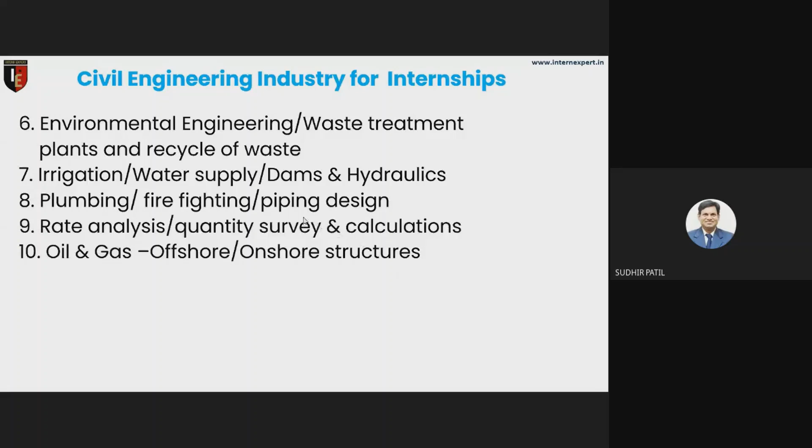Next one, construction management, geotechnical engineering and soil investigation, surveying engineering, building planning and drawing, environmental engineering, waste treatment plants and recycle of waste, irrigation, water supply, dams and hydraulics, plumbing, firefighting, piping design, rate analysis, quantity surveying and calculations, and offshore and onshore structures. So those are the various compartments, you can say that the bifurcations of the civil engineering branch.

Now basically we are having some questions which are asking by the students why this internship is required. So here what we are doing, we are bridging the gap between the industry and the institute, because whenever we are studying in the institutes, we are having the bookish knowledge. So we are polishing the students and making up the product, that is a student, up to the mark to work in the industry as an employee or as an entrepreneur.

Also, as per the AICTE requirement, it is a technical curriculum introduced by the AICTE to have the industry internship training program of the students, of the graduates or postgraduates, whichever they will work in the industry as a polished employee, as a pre-knowledge engineer.

So it is a very beautiful course introduced by us for the institutes, industry, educationists, and technocrats, where those people are working together. The students are having bookish knowledge, as I said, and when they are studying in the colleges, they are having some theoretical knowledge. So we are preparing them to have the exposure of the industry and work with the industry people.

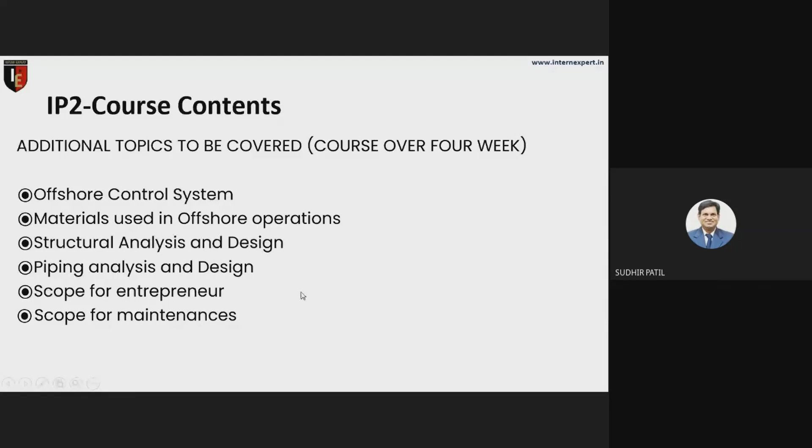As I said, this is the oil and gas industry. It is a huge industry having the scope for all engineers. It is not the ownership of a particular type of engineer. So as a civil engineer, I can say that the role of civil engineers can be played by various types of engineers. It may be mechanical engineer, or it may be polymer, petroleum, or electrical engineer playing this role here, as a civil engineer would.

Whenever you are entering this field, you are having that aura, that knowledge to work. This is an important factor you must take into account.

Next, as far as the world is concerned, the world is having production of oil and gas in thousands of barrels per day. That is 57,037 - the per day production of oil and gas, crude oil. We can say that is the hydrocarbons we are producing in the world. Here there are various countries involved to produce the hydrocarbons: Middle East and the Persian Gulf, North America, North Sea, North and West Africa, Russia, China, Indonesia, South China Sea, and others. So likewise, across this globe, the production is 57,037 thousand barrels per day.

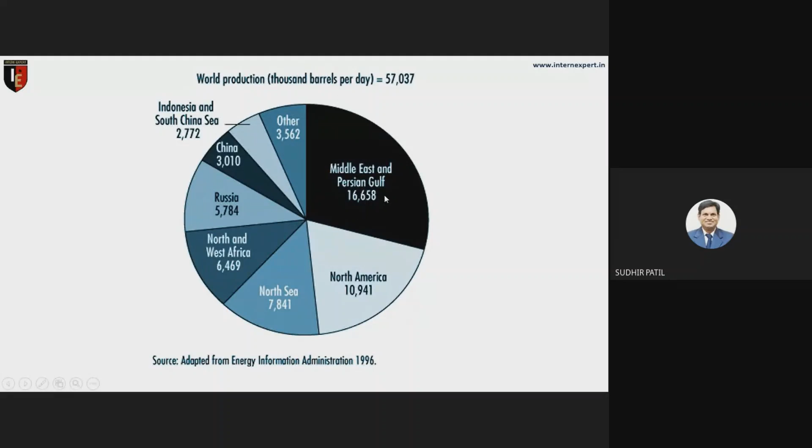Now we must understand there are various compartments, layers of the earth: inner core, outer core, mantle, and crust. The crust has a thickness of 0 to 100 kilometers, and here we can have the pockets of oil and gas. That means the lithosphere, crust, and uppermost solid mantle contain the pockets of oil and gas, or crude oil, you can say.

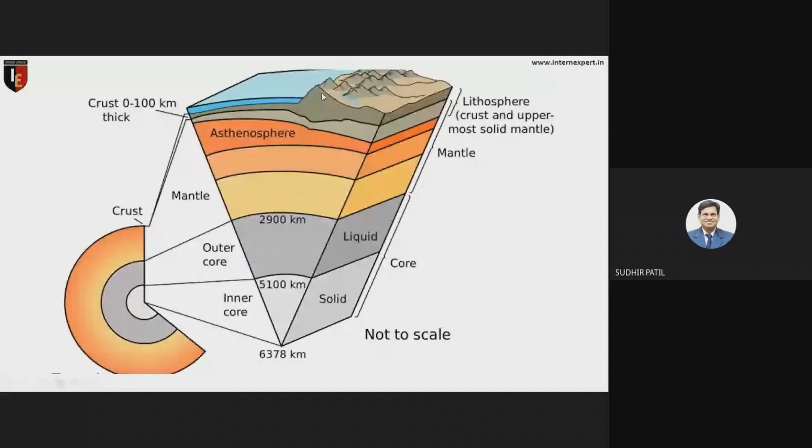Now, where and how can we find new resources of oil and gas? The oil and gas pockets are available in desert areas most of the time. You can observe that, or in the oceans, seas, or where there are faults in the layers of the earth. That means, in the figure, there are some hilly areas where there are faults in the various layers of rocks. So there is the possibility to find oil and gas pockets, or crude oil.

So we must investigate it first. There are various methods to investigate oil and gas pockets. Some questions are asked by students whenever we have these sessions: what methods are used to locate new oil and gas deposits in the earth?

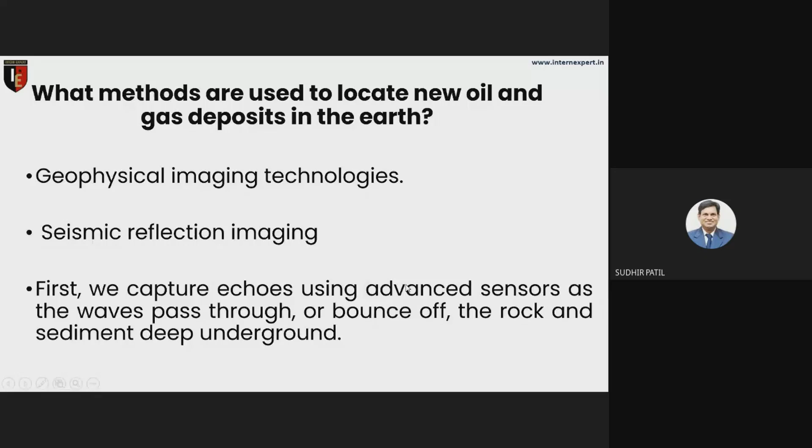There are geophysical imaging technologies, like seismic reflection imaging. First we capture the echoes using advanced sensors, as the wave passes through or bounces off the rock and sediment deep underground. We are also having other methods, which are gravity surveying, magnetic prospecting, and geochemical prospecting. Those are the various methods we use to find the natural resources of oil and gas, or hydrocarbons.

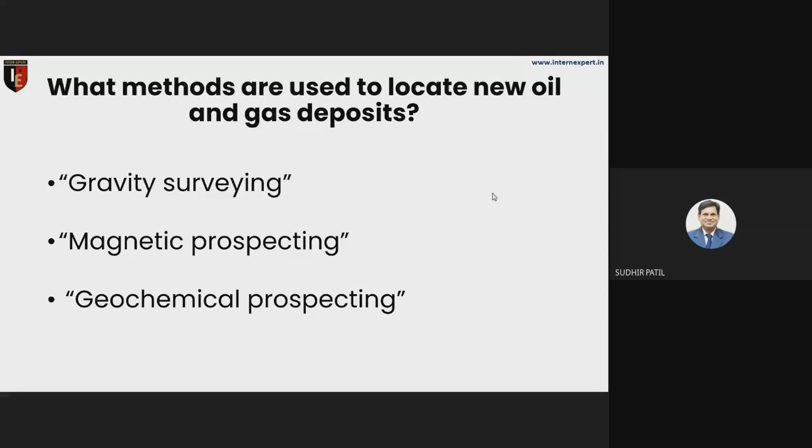Now, how does the oil and gas industry work? It is broken into three segments. I think this part has been explained by the previous mentor also, but I will just recap it and go ahead. So upstream, midstream, and downstream - those are the three main streams, or three segments, of the oil and gas industry. Upstream, or exploration and production companies, are working on extracting the raw material, that is the crude oil.

Then we are having soil investigation, geotechnical studies, and geological studies, which come under upstream, because it is the primary work we do in the oil and gas industry. In this primary work, we do soil investigation and site inspections, where we measure the land undulations, and we prepare the contour line plan. Then we are having a search for reservoirs of hydrocarbons.

That means we are finding the pockets of oil and gas, natural resources in the earth's crust. Then we go ahead with mining, that means drilling for oil and gas wells to extract them from the earth's crust. Whenever we have drilling in the earth's crust, we have to extract those natural resources in the form of liquid, solid, or gases. There are certain techniques used here in the upstream, that is the lifting and extraction of oil and gas. There are certain drilling companies that contract their services in the exploration and production companies which extract the oil and gases.

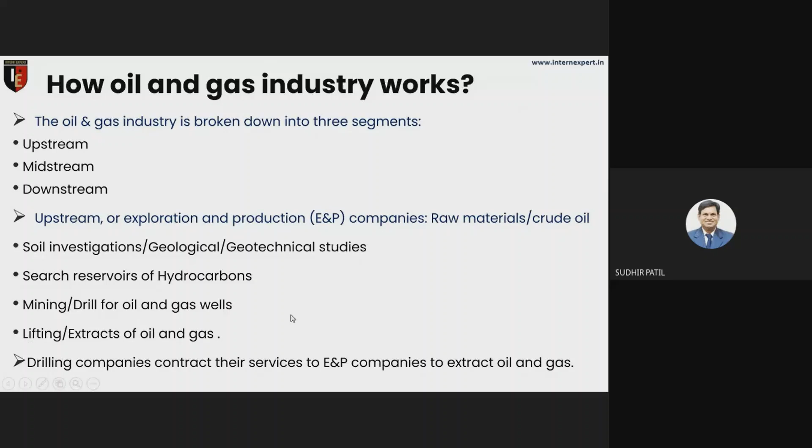Then we study the midstream. In this midstream, we have storages, because we are connecting from the upstream with the help of this midstream. So here we have storage tanks, pipelines, or transportation of crude oil from one place to another, or transportation of raw gases from one place to another. Pipelines, rails, and trucks are used here.

This is the connectivity between downstream and upstream. Now in the downstream, we have post-production. Post-production means we are refining this crude oil and raw gas into the final product. So post-production activities of crude oil and natural gases come under this downstream side. Here chemical processing, that is a refinery, is established, erected, constructed, and by that we get the final product, which may be petrol, diesel, kerosene, etc. Then there is distribution of the final product of oil and gases, and we have retail outlets, that means petrol pumps, oil pumps, CNG pumps, and all. So this is the downstream side.

Now, what is upstream, midstream, and downstream in oil and gas? As we discussed previously, those are the three streams we have. Now where and how can we find new resources of oil and gas? Basically this part comes under surveying, geotechnical investigation, and geology. This is done by civil engineers, so I will elaborate on that part very well.

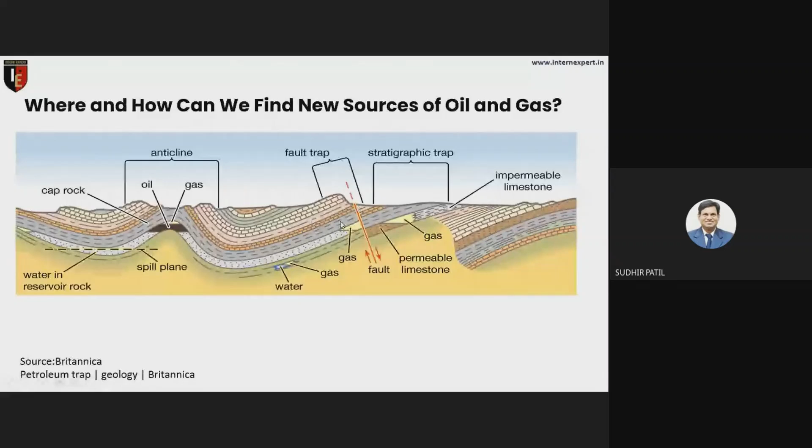This is the layer, one layer of rock which is ending here at the ground level. The layer is there, and at this point, at this line, there are the faults. This is one layer, and here another layer is there, which is the same but at a different level. So at this level, at this fault trap, we also observe that stratigraphic faults or traps are there, where we can find these natural resources of hydrocarbons.

Also, we have impermeable limestone, and near to that we can observe these natural resources of oil and gases. You can observe in the figure very well. This is the anticline trap, where we can observe the oil is there and gas is there, and we are extracting it with the help of oil wells.

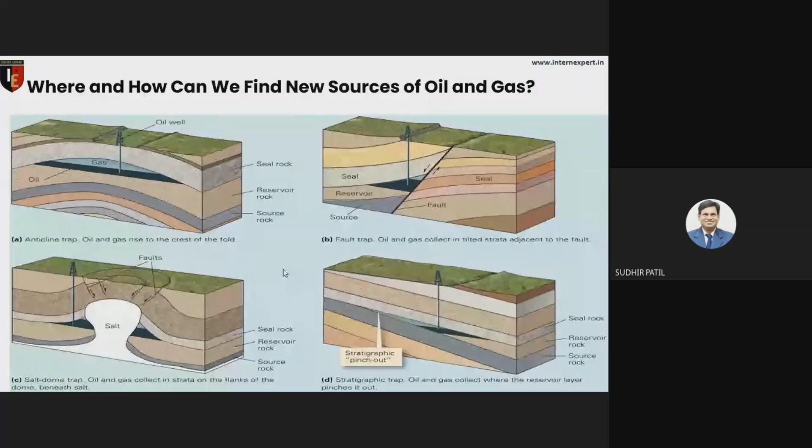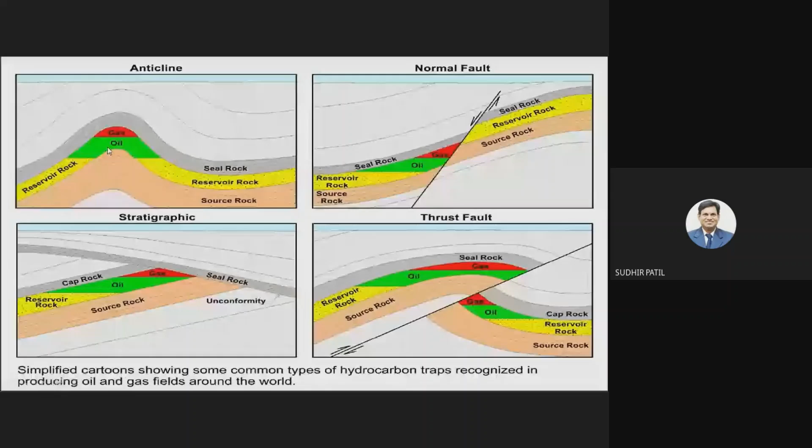In this figure you can observe that oil is there and gas is there. Oil is having maximum density, therefore it is below the gases. So here oil is deposited below the gases. Likewise, we are having various faults, and accordingly we can observe the various pockets and traps of the oil and gases in the faults.

So this is the source rock. Likewise, we are having the various rock layers, and accordingly we are having the trap. In this trap we can find the actual resources of the hydrocarbon.

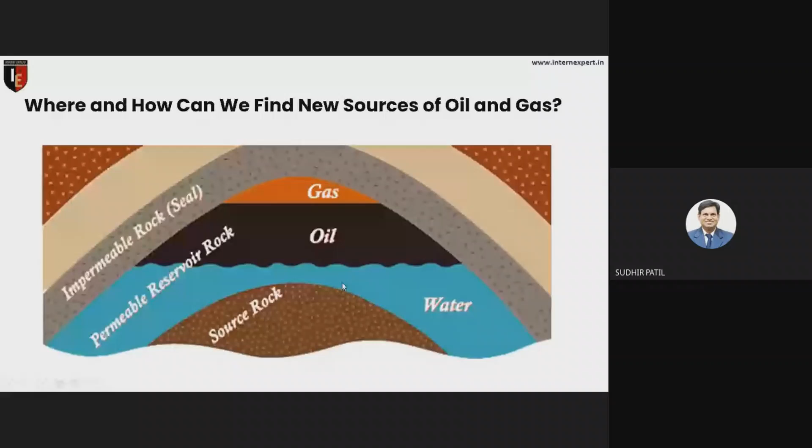Now here this is the oil well. We are drilling here, and we are trying to extract the natural hydrocarbons. Here there is an impermeable rock, and here there is a water layer, oil layer, and gas layer, and there is a reservoir rock. So you can understand that in between the impermeable...

So geologists use a lot of information to locate oil, gas and natural gases. The geologist has certain study and experience in this field, so he can observe the various chemical compositions in the soils and rocks, and accordingly he is collecting the information and trying to think about where the oil and gas pockets are available.

By drilling several cores also, we are taking them mile apart, and accordingly we are correlating those cores of the rocks, and accordingly we can find the pockets of the natural resources of oil and gases.

Now there are other techniques we are going to use, that is seismic signals. The question was asked by the student: how and where we can find new resources of oil and gases. So by generating the seismic signal in barren land or seashore, that is, it may be onshore or offshore, for the natural resource of oil and gases.

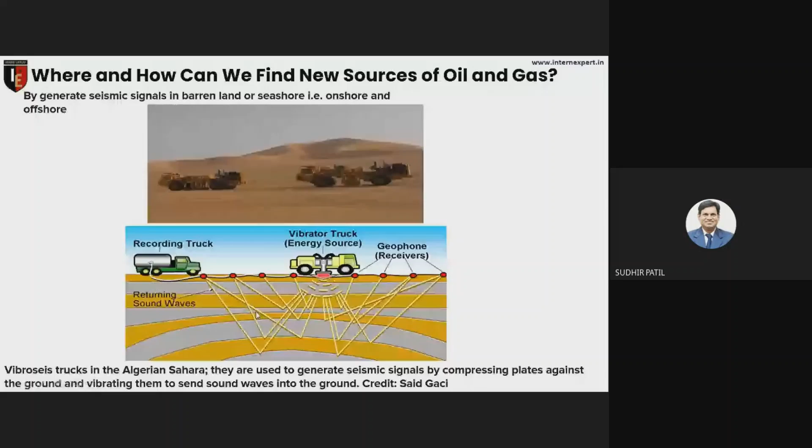Hello, yes please. You, sir. Yes, hello. Sir, I have a question. Hello, sir, hello. Yeah, please. Sir, yes, please carry on.

Sir, these signals that we have shown in the slide - do they reflect only through the oil, or can they also reflect from the water?

No, it will reflect through the various layers of the rocks. Depending on the type of rock, we have different reflected waves, and those are caught by hydrophones and geophones. Depending on the type of rock, we can have different intensity of waves, and accordingly we analyze it. It will have different intensity at the reservoir. It will not be reflected through the oil and gases; it will be reflected through the layer of the rock. We analyze it, test it in the laboratory, and correlate the results.

So there are different types of intensity we are having, various different velocities, and depending on the different velocities, we can analyze the pockets of the hydrocarbons - is it available or not.

So hydrophones we are using in the offshore areas, and geophones we are using for the onshore areas. Depending on the velocity of the reflected waves, we are searching for the natural resource of oil and gases.

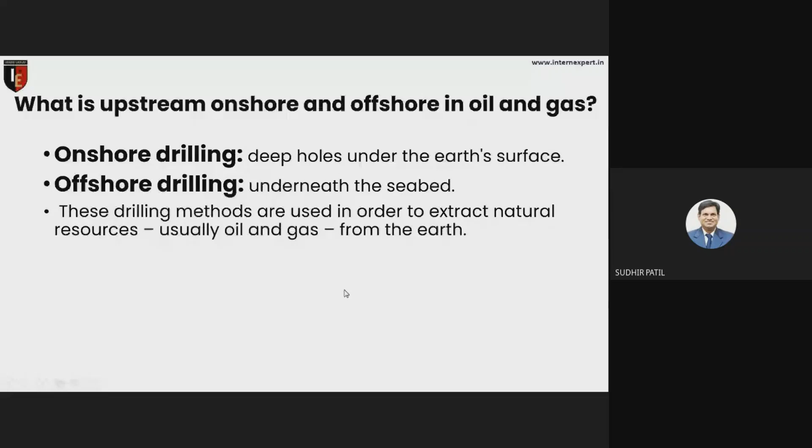This steel structure is very heavy because we have a huge blow on the ground, as well as a core cutter or drill bit which we use to drill the earth. This steel structure is erected on the ground and has tremendous forces acting on it - it may be horizontal or wind forces, it may have self weight, it may be live load, machine load or impact load, as well as earthquake or seismic load.

So those loads must be considered while analyzing the structure. You must design this structure first, because the derrick is an important temporary structure. Prior to that, we must analyze which types of forces are there - various types of forces acting on the structure, which are lateral forces.

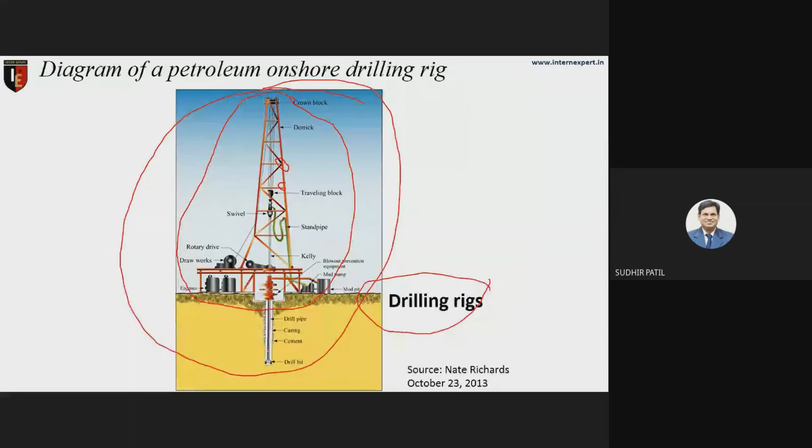Now we can observe the various components of this drilling rig. These are the derricks and this is the platform. On this platform we have various machines and engines, and the turntable, and then we have the drilling bit in operation.

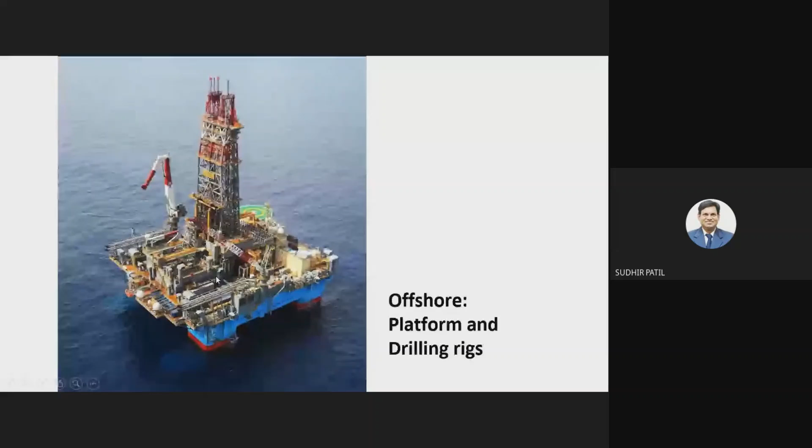Now we have these operations, and we have various compartments through which we can extract. First we drill the rigs, and then we go for the extraction of the oil and gases. So this is the steel structure.

These steel columns rest on the hard rock. Those are the various steel columns, and on this steel column we prepare the platform, and over that we have the drilling rigs or derricks.

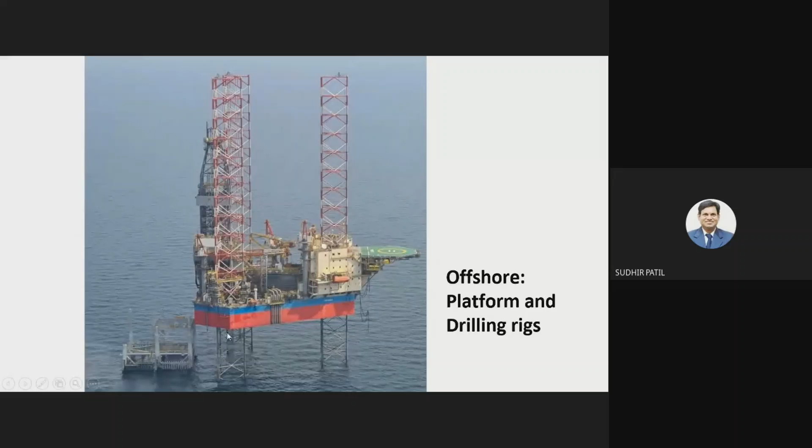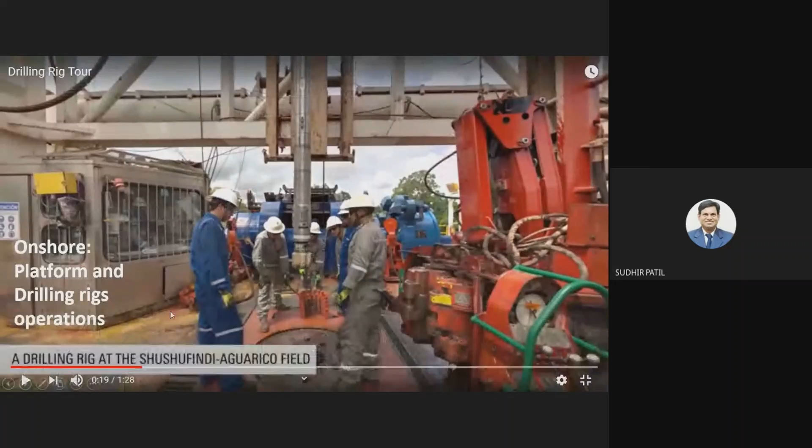Now you can understand the drilling rig is there, this is what the oil well, or drilling rig, you can say. Here is the pipe, and this is the cutter, the drilling cutter, which is passing through the hole, and the hole is completely sealed, because whenever we have drilling operation, it may have some oil and gases which may poison us. So it is very airtight, and we can evacuate it through particular processes.

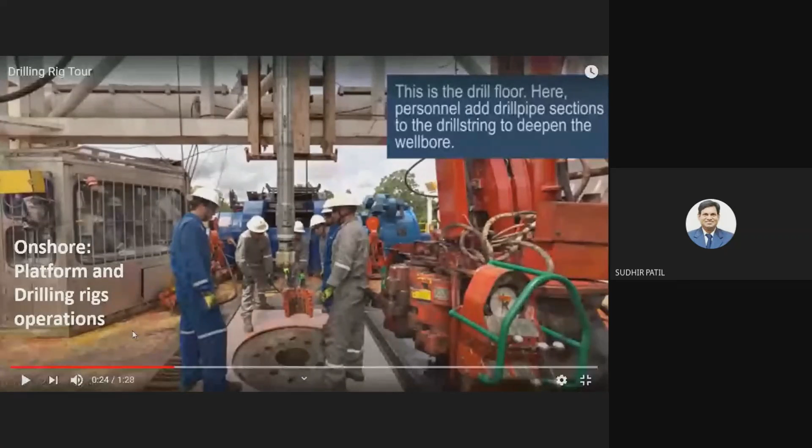This is the drill floor. Here personnel add drill pipe sections to the drill string to deepen the well bore. So here you can observe in this figure, this is the well bore, and through this well bore we are having the drilling operation.

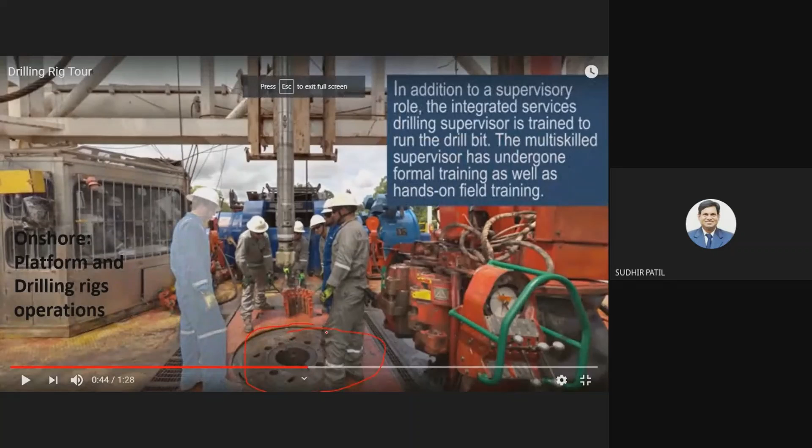Now the driller cabin is where the rig staff controls the drilling operation. Those are the various staffs who are going to control it. In addition to a supervisory role, the integrated services drilling supervisor is trained to run the drill bit. The multi-skill supervisor has undergone formal training as well as hands-on field training.

The drilling or drill string is equipped with the power drive rotary steerable system and stinger, that is conical diamond element technology. A customized Smith drill bit is used here, a custom Smith drill bit we are going to use.

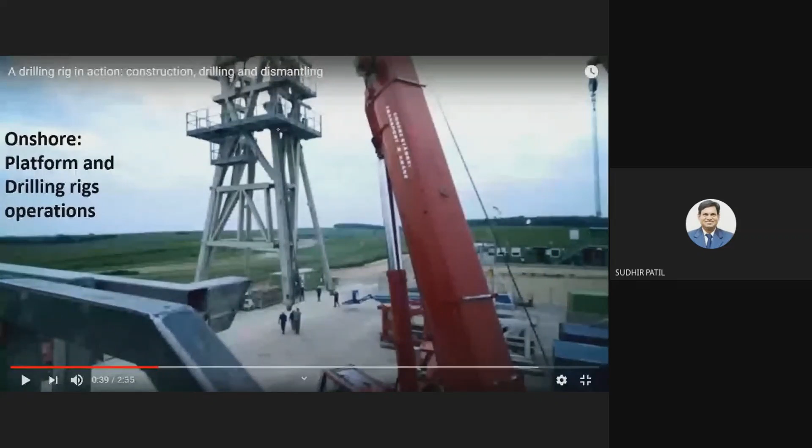Then the field technician is supported remotely by an engineer in the Asset Integrated Management Center in Quito. Here this is the platform and this is the derrick, which is going to be used for the drilling operation as well as for the extraction of oil and gases. Most of the time it is a temporary structure made up of steel.

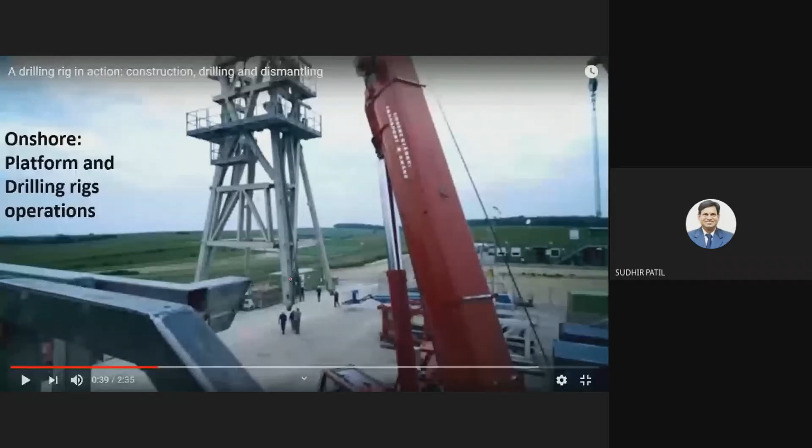Those are the heavy elements of the steel which we are going to use, because there are huge amounts of forces coming on the structure. Accordingly we design it so we can dismantle it and erect it in another place. This is the 40.77 meter structure height of the derrick we are going to use for the drill operation. This is the dismantling of the derrick we can observe in this figure.

This is the platform drilling rigs we are going to observe from this photograph. This is the photograph for the drill rigs.

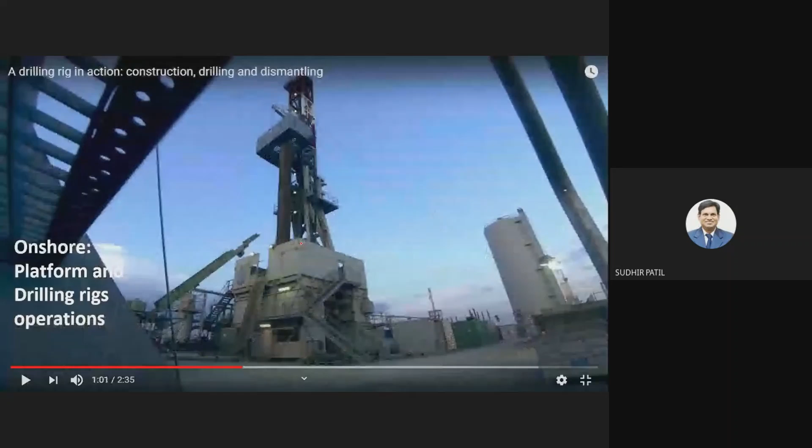Now as per our observation, there are different types of offshore drill rigs, which are drill ships, semi-submersible, jack-up rigs, drilling barge, and a land rig. So those are the various rigs we are going to observe in the offshore and onshore regions.

Now here, this is what the drilling pipes which are transferring to the water, and again we are touching the ground, and here we are starting our drilling operations from this floating platform. So those are the various platforms you can observe here. Depending on the depth of the water, we have various types of platforms to operate the drilling.

This is the onshore drilling rig. Now, after drilling the earth, after drilling this particular layer of rock, we have various methods to lift the crude oil or natural gases.

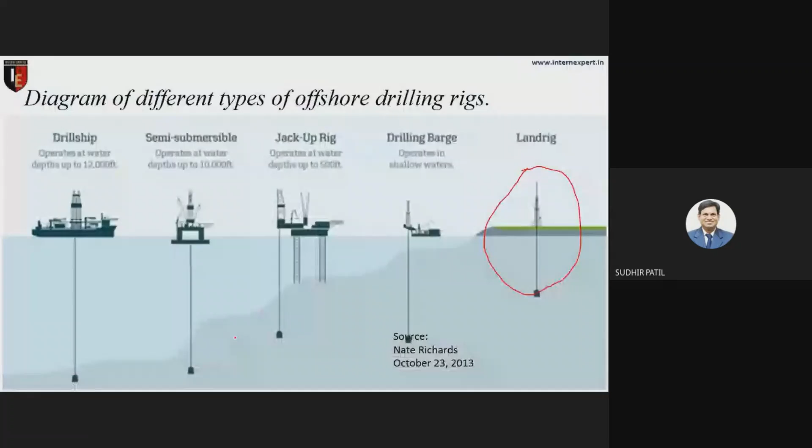Now, the first method is the natural method to evacuate or extract the oil and gases. So many times, whenever we are drilling the drilling rig, the natural oil and gases come up on the surface of the earth. But whenever the level of the oil and gas is low, or resources are at maximum depth, that time we must use certain methods.

So there are various artificial methods. Number one is the rod pump method, which we generally observe for this operation to extract the oil and gases. Then another method is the hydraulic pump we use to extract oil and gases. Then another method is the submersible electric pump.

So those are the methods we are generally using in a borehole to extract water. Similarly, the same type of electric submersible pump we use to extract oil and gases, natural resources. Another method is the gas lift we are going to use.

On one side we have the pressure of the gases, or pressure of the oil, or pressure of water, and on the other side it will automatically bring up the natural oil and gases from the oil well. The plunger lift method is also used to extract the oil and gases. Then we have the progressive cavity pump.

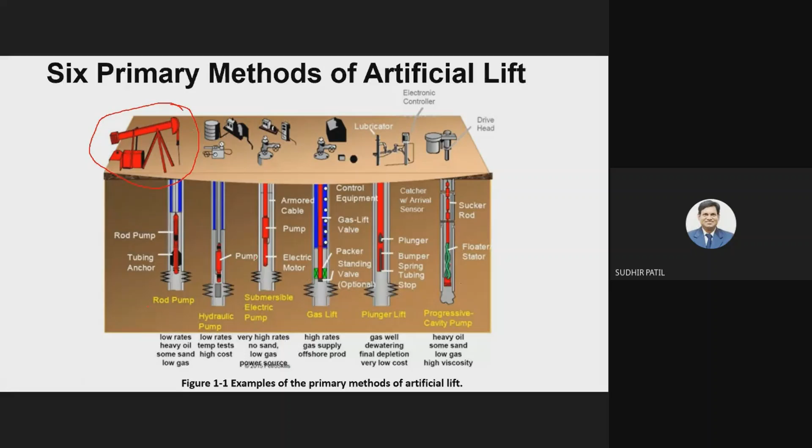Now, in the upstream side, as per our discussion, we have exploration, that is searching for oil and gas pockets. Then we have production. Here we have the drill rigs, drill holes, we can say oil wells. From these oil wells, we extract oils and gases by using various methods. It may be natural method, gravity method, or it may be artificial method to extract it.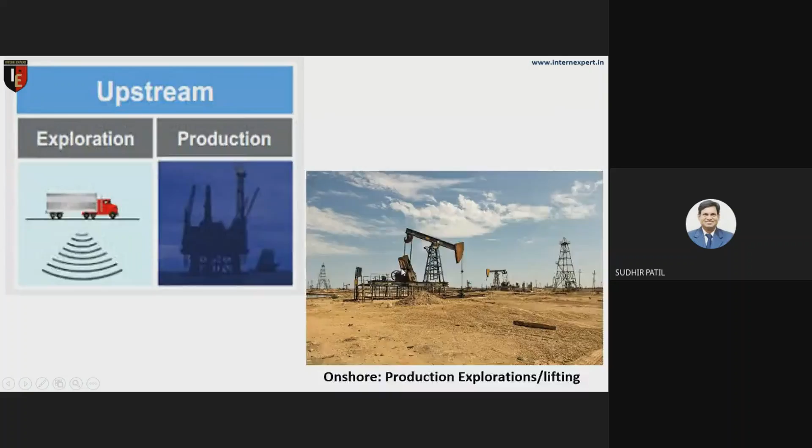So those are the artificial methods we use for the extraction or exploration of oil and gases. This is the mechanical process, as I said, to extract the oil and gases from the earth's crust.

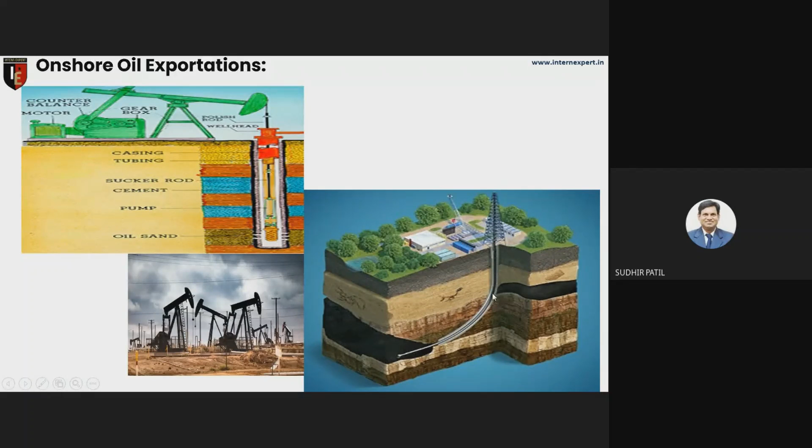This is a drill rig extracting oil and gas with the help of various systems. Those are the platforms situated in offshore areas, made up of RCC and steel structures. You must understand that these are the various structures we construct depending on the availability of crude oil in the earth's crust.

There are various permanent structures we construct because we know this project will run for a long time. Therefore we permanently construct structures in this region, and accordingly we can extract oil and gas with the help of oil wells. These are the various platforms to drill the oil well and extract oil and gas from the earth pockets or natural resources of hydrocarbons.

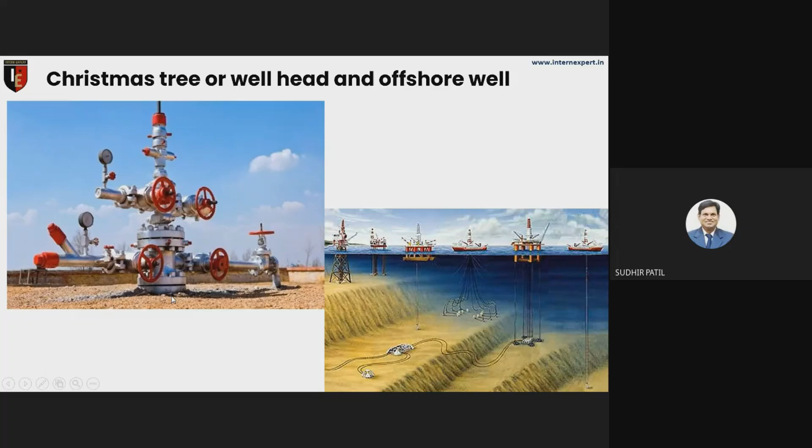This is the Christmas tree, used to balance or maintain the pressure of the oil well to extract oil and gas. Now this is upstream. Upstream is a term for the operation of exploration of oil and gas and production, often applied to the oil and gas industry. Upstream activities include exploration, drilling, and extraction - these are the three main components involved in the upstream area.

Now there is a petroleum chain: upstream industry, midstream industry, and downstream industry. In the upstream industry, we carry out geological survey of the land. Whenever we go for operations of oil and gas, the first work is to do a geological survey of the land. We must take samples of the land, test them in the laboratory, and check the various chemical compositions present in the soil.

Accordingly we go for further study - that means drilling the ground, taking the core of the rock, analyzing it again in the laboratory, and then we conclude whether there are oil and gas pockets, or a possibility of oil and gas in the region. Then we use sensor technology, or seismic wave technology, to identify the oil and gas pockets in the region.

Then we go for mining and drilling. But before that, we must understand that whenever we are searching for oil and gas pockets in the region, we have to prepare the ground so that there is some infrastructure - a road must be there, water availability for the workers and for drilling operations, and connectivity of rails or pipelines from the upstream side.

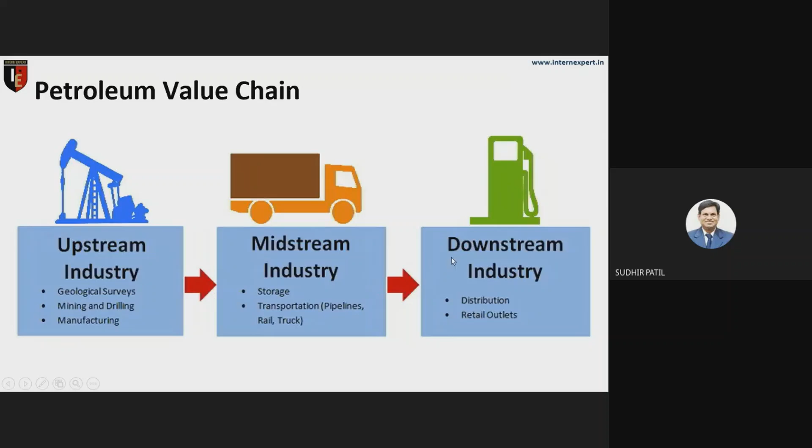On the upstream side, we have extraction of the crude oil, and in the midstream side we have connection with the help of pipes or transportation like rails, and then we store it and perform the initial preparation or purification here. Then we send the product to the downstream side with the help of pipelines, rails or trucks, where it is purified for distillation or distribution.

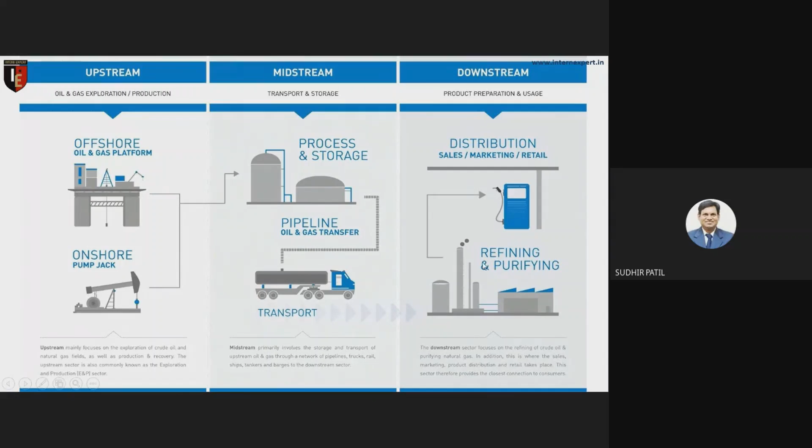Then we have the refinery. Here you can observe in this figure, upstream is there, then there is a pipeline in the midstream side connecting to the downstream area. In this downstream area, the refinery processes crude oil to produce different products like chemicals, petrochemical plants, polymers, plastics, and other final products.

Now, in these three streams, what is the role of civil engineers? The civil engineers play a very important role in all three areas, because here we are going to construct all types of structures, such as floating platforms, submersible platforms, or stable platforms. So all these platforms we are going to construct first.

Prior to that, we must start with soil investigation, geological investigation, and rock foundation study. That investigation must be done first, and after completing this primary work, we must go for the analysis of the platform. In this analysis, we have different types of loads that must be considered for the analysis and design of the structure.

In this analysis and design, we must understand and prepare the plan of the structure and the platform, and accordingly segregate it into different components. Because there are different areas and zones, and as per these different areas and zones, we must allocate the various machines and electrifications.

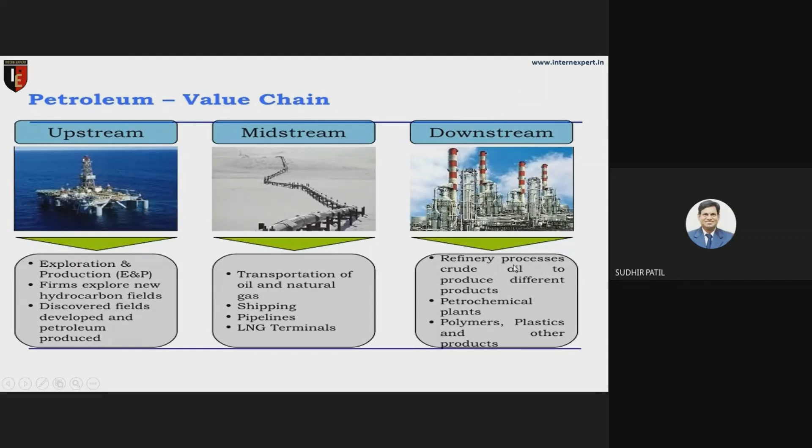And then we prepare the final product. So those are the various structures we are going to establish, erect, or construct as per the streams.

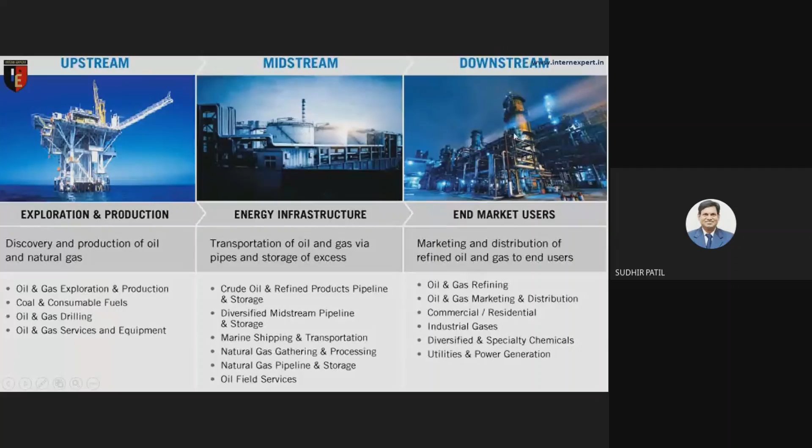Here we have the upstream region, here we can understand the midstream, and here we can understand the downstream, that is the refineries.

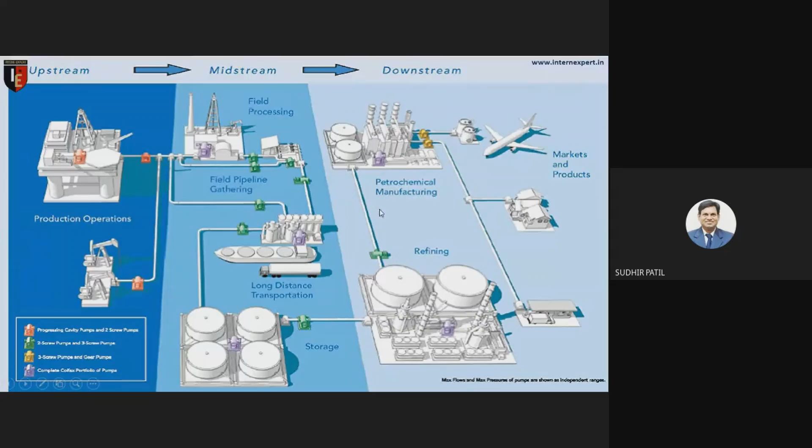In this figure, you can understand the various structures: production of the crude oil, storage tanks with the pipeline system, then going to the downstream side for the refineries, purification of the crude oil into the final product, and sending this product to the market.

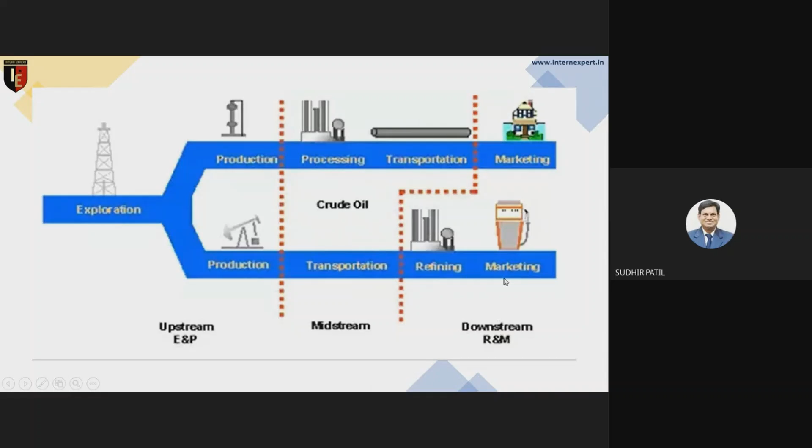So exploration, production, then processing, transportation of the crude oil, marketing and refining this product, and sending it to the end users, meaning we people are going to use it. Now there are various challenges in the upstream region.

Here in the upstream region, the challenges are sources of the crude oil, because it is a very tedious process to identify the natural resources of the hydrocarbons. So it is having one challenge.

Next, the operational challenges are there, because in any season, it may be rainy season or winter season, we must have to work with it. Depending on the climatic condition, we must have to work. So it is having operational challenges.

Then we are having the marketing and pricing. Day by day, it may be fluctuated depending on the political scenario in all countries.

Then we are having environmental pollution. Whenever we are going to have the upstream area construction, there must be some purification plant, because we are extracting various chemicals from the ground and bringing them to the top of the soil. So it must be recycled or purified, and this is again the big challenge for us: environmental pollution.

Then we are having fluctuating crude prices. As I said, depending on the political situation of the country, it may have the fluctuation of the crude prices.

Then economic uncertainties. Various countries are having economic situations which are very bad. So accordingly, we must account for economic uncertainties.

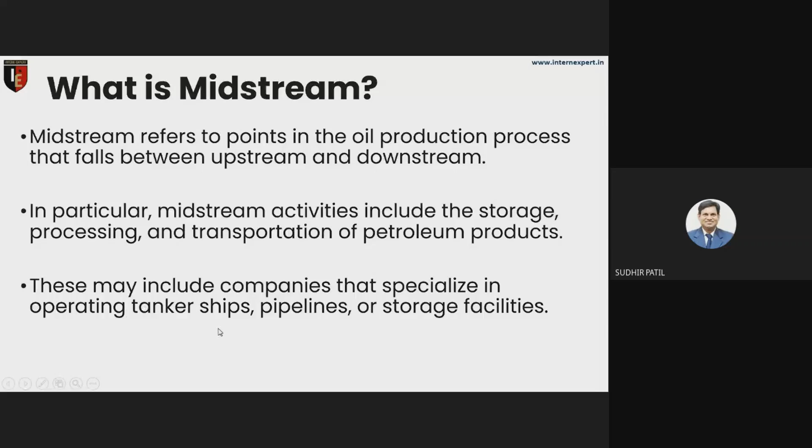Then what is midstream? We understood the midstream side in previous slides. Here, the important part is that we must use the pipeline system. This pipeline system may be passing through the ground, or it may have some supports, and accordingly we are transporting the crude oil from one place to another - from the upstream side to the downstream side for purification.

Here the big challenge is corrosion of the pipes, because as per our previous discussion, there are various chemical compositions present in the soil and rocks through which the pipelines pass, which causes a corrosion effect on the pipes. We are transporting crude oil through the pipelines, and those crude oils have hazardous chemicals which are corroding those pipelines. So it is a big challenge.

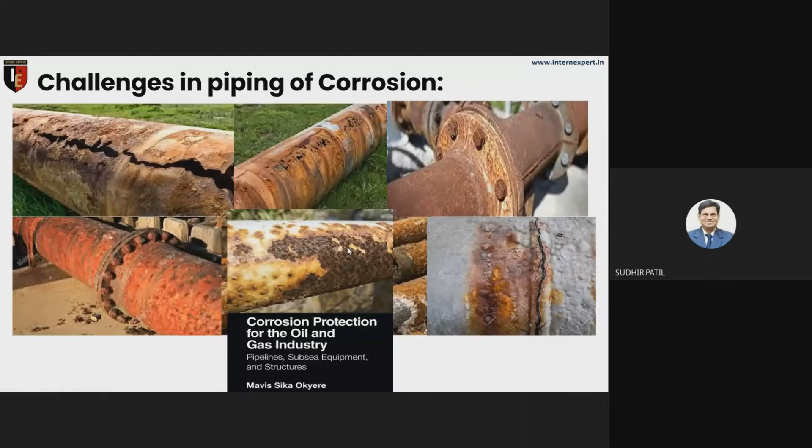We will discuss this part in detail in tomorrow's or the day after tomorrow's session. This is again the big challenge for the midstream side as well as downstream side.

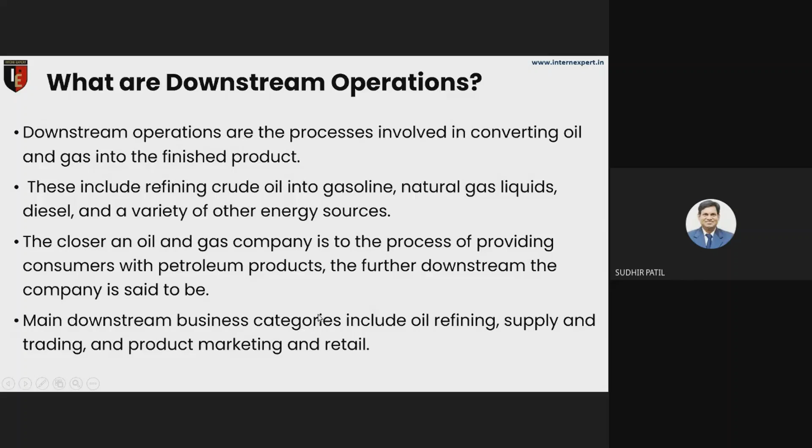Then downstream operation - as per our discussion, we are having here various business categories including the oil refineries, supply and trading, then product marketing and retail. Those are the main business categories in the downstream areas. The main downstream business categories include oil refining, supply and trading, product marketing, and retail outlets.

It is a big earning stream, the downstream, because we are extracting the oil and gas from the upstream and transporting it to the downstream area. Here we are purifying this crude oil into various products. Then we are having the supply and trading part, where we have fluctuation of prices, therefore we have chances to earn more money. Also, in product marketing, we are having very highly paid areas.

In the retail outlet, that means petrol pumps and LPG pumps, we are having certain margins to sell the product. So in this way, we are having the downstream area. This is the refinery process unit.

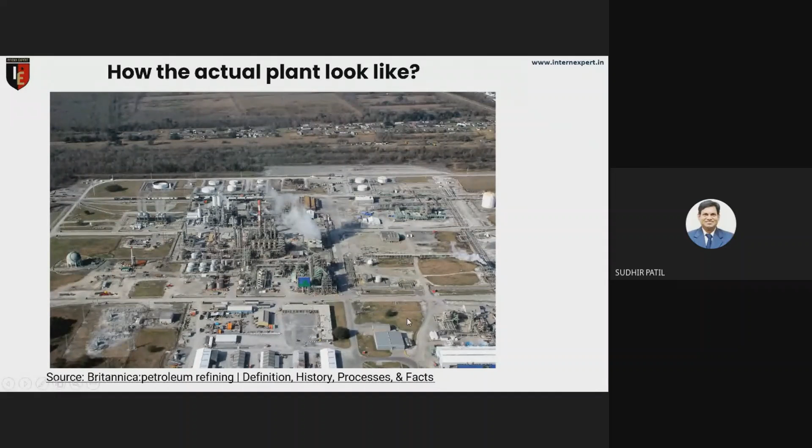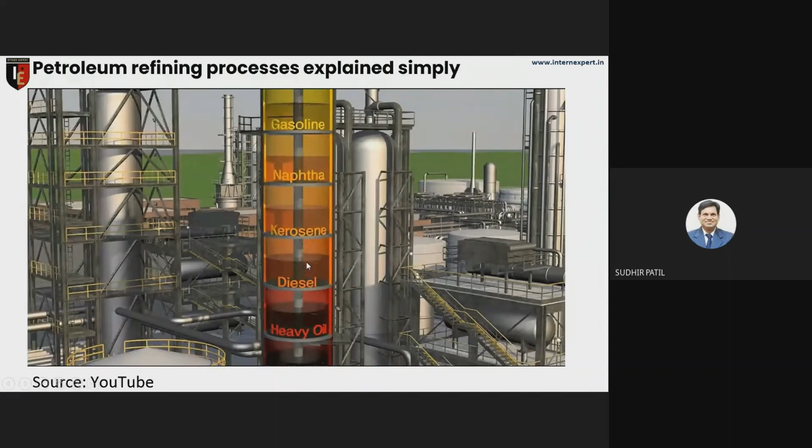The petroleum refining process is very simple to understand, because there are various layers of the final product, which is heavy oil, diesel, kerosene, naphtha, and gasoline. Depending on the density of the liquid, there are certain layers which are prepared automatically, and accordingly we are extracting it. So this is the crude oil refinery unit, you can observe in the figure here.

First, atmospheric distillation uses heat to separate the crude oil into naphtha, light gas, and heavy oil. Next, the second unit is where atmospheric residue is further distilled to extract oil under vacuum condition. Then we have the third unit, where heavy oils are cracked into usable products using several processes. Blending creates the final products.

So the intention to show this figure is that this is a huge industry having a lot of civil engineering work, mechanical engineering work, electrifications, and all types of engineers playing an important role, along with MBA people, because we must manage this industry with the help of management people. So all stream people can occupy here.

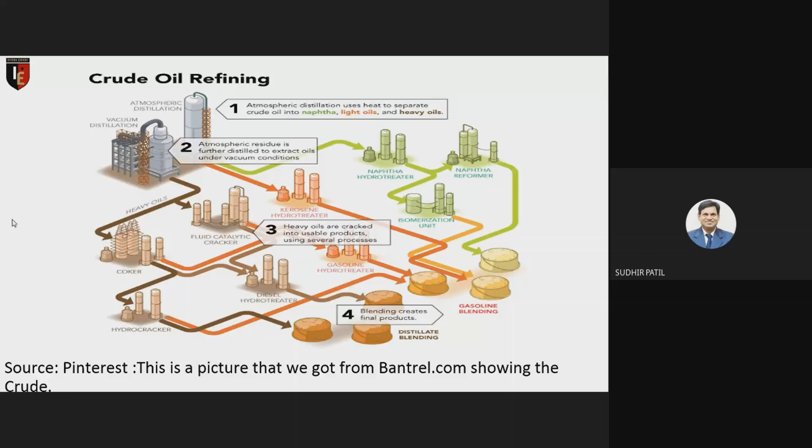The bifurcation is that we have civil engineers, who prepare this industry from construction onwards. Then we have mechanical industry people who allocate the various machines. Then electrification is there. Then we have the account section. Then we have streamline people like MBA people who work with this, and accordingly they channelize this industry to work together, and accordingly we run this industry.

Now as per our previous discussion, we are having various products which are residue, heavy oils, heavy gas oils, medium diesel, distillate, kerosene, naphtha. Those are the various layers, and we are passing them through various processes, that is coker, cracking units. We get the final products, that is end products: asphalt based industrial fuel, motor gasoline, jet fuel, diesel fuel, LPG gasoline, diesel fuel, jet fuel, and gasoline and LPG. Likewise, we are having the various products depending on the densities.

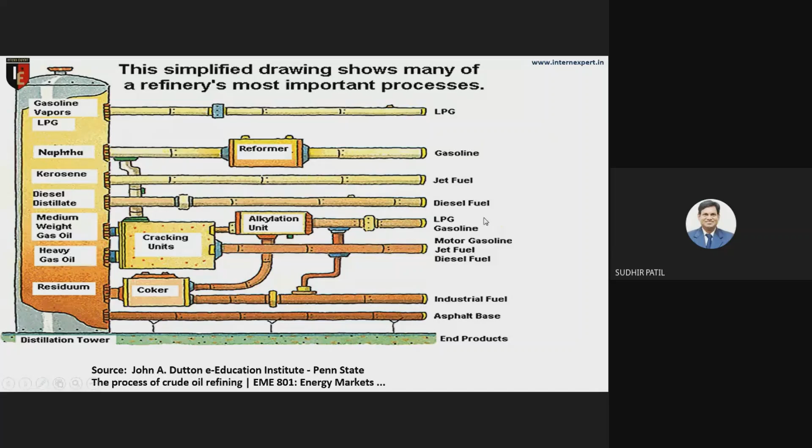The asphalt is having maximum density, therefore it is at the bottom, and LPG is having very less density, therefore it is very light, therefore it is at the top. So likewise, we are having various bifurcations of the final products which we are going to use as an end product. So this is the line diagram for the oil refinery, you may observe it in the previous session.

Then, as per our discussion, we are having various final products. There are various processes. Through these processes, the secondary process, intermediate processes or intermediate product passes through, and we are getting the final product. There are various temperatures. At various temperatures, we are extracting various types of products, intermediate product and final product.

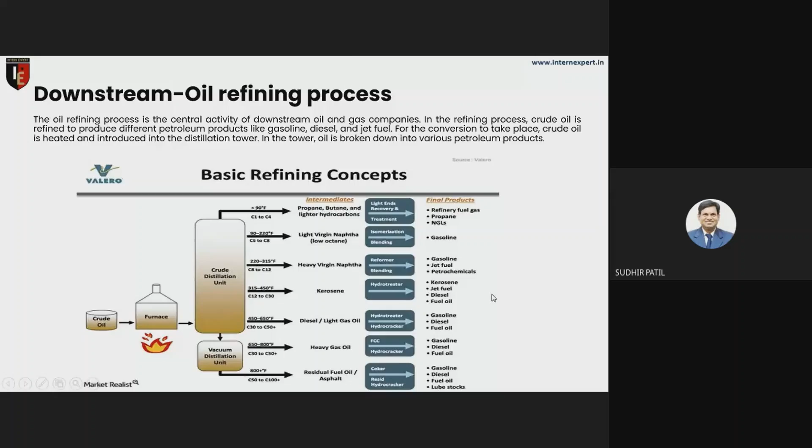That means we are using this gas, LPG, for cooking. Then chemicals are there, petrol and diesels are there. Then there is jet fuel, paraffin, which we are going to use. Then we are using diesel fuel. Then we are using lubricating oil, wax, polishes. Then fuel for ships and residential or industrial processes. Then bitumen for the tar road. So those are the various products.

Likewise, we go to the market study and supply. Here, those are the manufacturers.

Manufacturer means the refinery unit, and the refinery unit is playing in the two-way traffic. That means the manufacturer is having certain products. Product distribution is there, then product retailer, and then we are having the consumer.

Then we are having the reverse chain. Reverse chain means demand planning. So as per the market demand, the marketing people are doing a survey of this area. Accordingly, we do the demand forecast, and accordingly we plan for the supply. Then we send the requirement to the supplier, and the supplier sends the requirement to the manufacturer. So likewise we are having the two-way traffic, two-way study, by which we can send the final product to the end users.

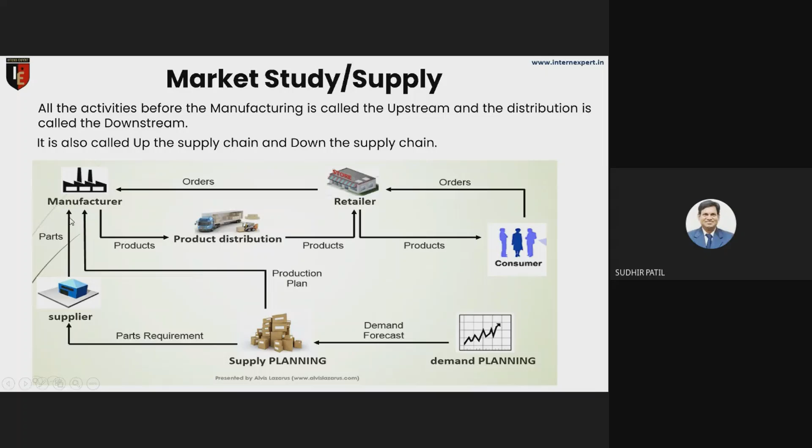So here you can understand the upstream, midstream, and downstream in one single figure. I think this is the oil and gas industry. We are extracting from the ground and sending it to the whole world, and this is a very important product. We cannot live without this end product. So likewise, this is the overview of the oil and gas industry.

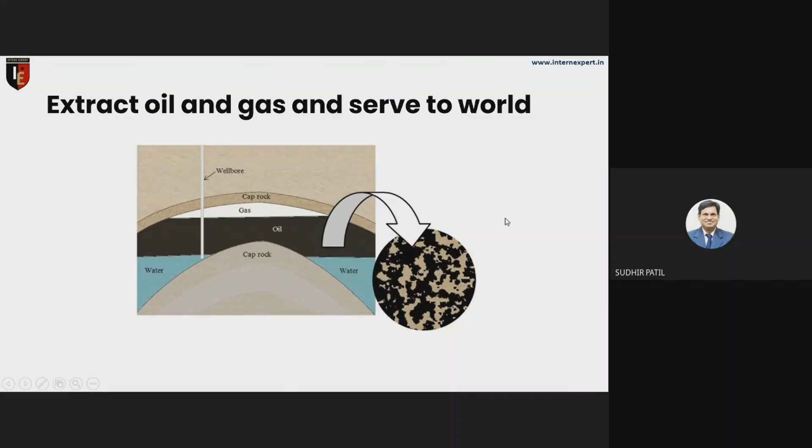So those are references, you can go through them. Those are some references which have some videos. You can go through them to understand what the oil and gas industry is. Thank you. If there are any questions, you can ask, and accordingly we will have interactions.

Hello, sir. Yes, please. Sir, this is Sulaiman. Yes, please, Sulaiman, go ahead. Sir, you said that oil can be found by the 100 kilometers mark, right? You said that oil could be found only from 0 to 100 kilometers from the Earth's surface.

No, in this zone, but we are not going to 100 kilometers basically in the Earth's crust. This is the first layer. In this first layer, we are going to extract. It is a possibility to have the deposit of natural gas, natural resources. Here now, yes, this is the first layer. In this layer, there are various layers of rocks. The lithosphere is there, and in this lithosphere, most of the times we are finding the hydrocarbon pockets.

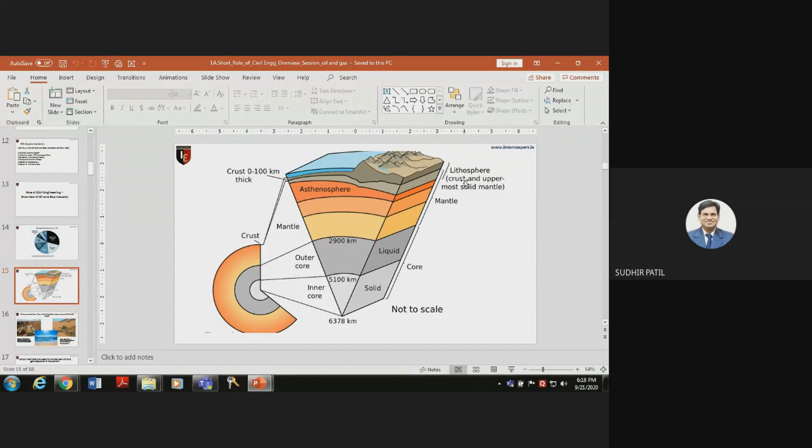Sir, then the oil bed consists of the first layer of gas, the second layer of oil, and the third of water, right sir? So if you're basically drilling bores for home usage, that means the oil comes before water, no sir? You know what happens?

It is depending, as I said, on the density of the liquid. If the density of the oil is more than the water, it will go down. If the density of the water is higher than the crude oil, it will go down automatically. So depending on the density of the liquid, it will have its position. But the density of water will always be more than the density of oil, no sir? Not necessary, it is not necessary.

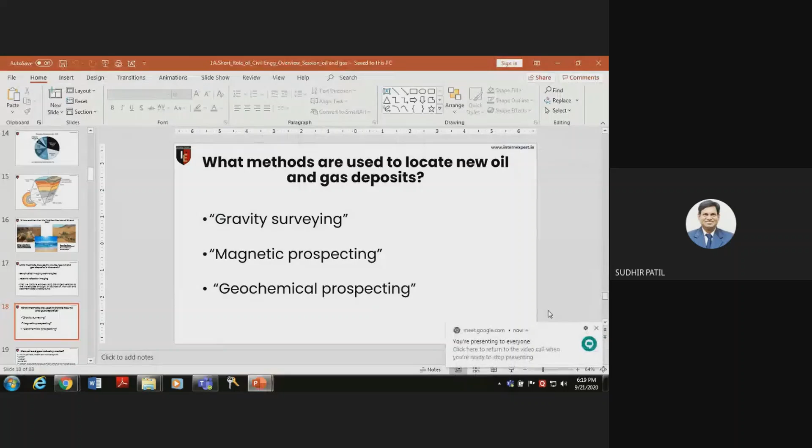You can see in the final figure, there are various products we are having. So those products have different layers because different densities are there. Therefore, there are certain different layers, right? So it's not necessary, it depends on what the density is. Okay, next one, yes, another question.

Hello sir. Yes, I think it is sufficient, please carry on. Sir, in the start you told about the rigs and the various types of loads acting on that rigs, so please explain about that, sir. Very good, what happened now?

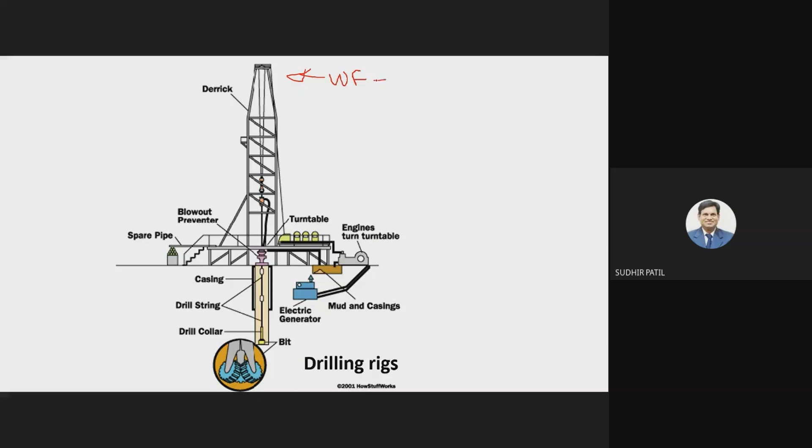We are having various forces. As I said, I will show the figure first and accordingly we'll go ahead. This is a derrick, this is a drill rig. You can say that on this drill rig we are having various forces. Those forces are lateral forces. Lateral forces means what - first we must understand there is a wind force. Then we are having the self weight. Self weight means this steel structure is having its own weight, so dead load is there. Plus we are having live load. Live load means we are having the people who are moving on the structure to erect it, to have the connections in between, so we are having live load.

Then we are having the machine load. Machine load means we are having the assembly of the drilling rigs. This drilling rig has some assembly and it has certain machine load as well as vibrations. So machine load is there. Then we are having vibrations, because whenever we are drilling, there is a tremendous amount of vibration generated. So vibration load is also there.

Then we are having the earthquake load. Depending on the area where we are going to construct this drilling rig, we are having the seismic load also. So seismic load is also there, we must have taken into account. So those are the various loads we must take into account while designing this derrick, or designing this drilling rig.

Then we must have to understand the platform. On this platform, all loads will be taken into account, because those loads are coming from the derricks, or we can say the steel structure which is used for the drilling operation. Now here, this is what a platform is.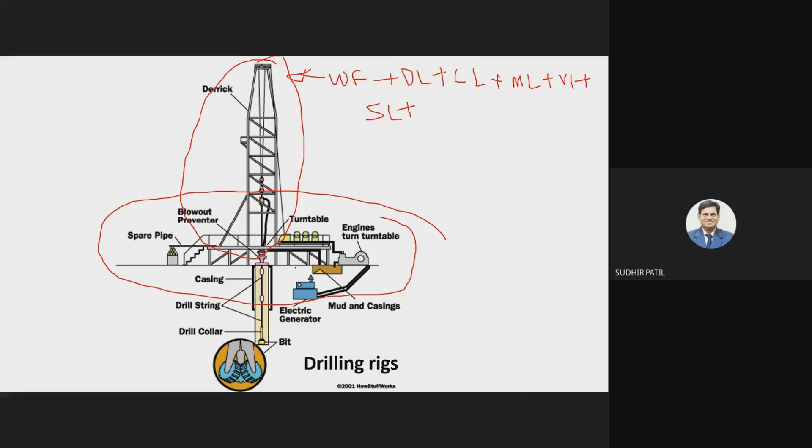On this platform, as per our previous photographs, there are various compartments. You can observe here, there are various compartments. So those are the various compartments. Here there are offices or the living areas. Those loads must be considered.

There is a parking area, that means movable load must be considered. Then there are certain mechanical processes or machines. Then we are having some tanks, liquid tanks, water tanks, those must be considered. Then we are having some storage sheds, those must be considered.

So likewise, we must start to consider all these loads which are coming on the platform, and accordingly we must start to construct it. Here, this is what the derrick, or the drilling rig, we are going to understand and construct. Here there are various chambers we must understand and take into account, and after taking into account all loads, we must construct this platform.

So here it is a very huge platform we must construct for the operations, that means drilling operation as well as extraction operations. So this is the part we must take into account.

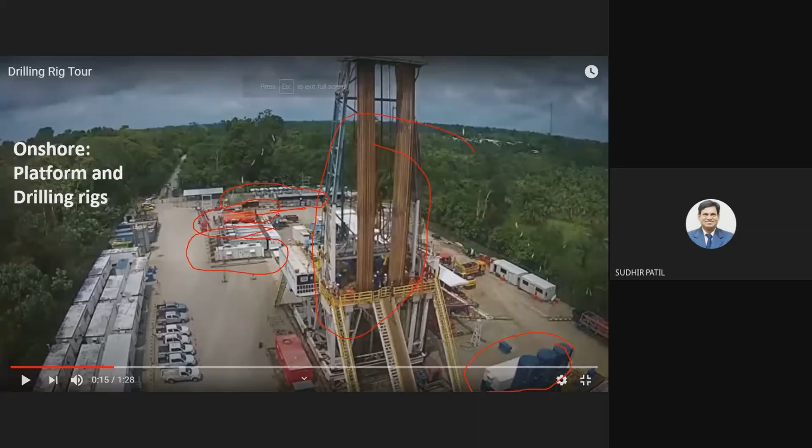Sir, a further question I have. Sir, these rigs are designed in such a way that they can resist the shocks of earthquakes.

Yes, of course, you must take into account non-linear forces. Non-linear analysis must be taken into account while designing the derricks. That is there because depending on the different zones, our Earth is divided into a number of zones. Depending on the earthquake intensity or possibility, we have different zones, and by that we can consider different factors, load factors or seismic factors, for the non-linear analysis. That must be taken into account.

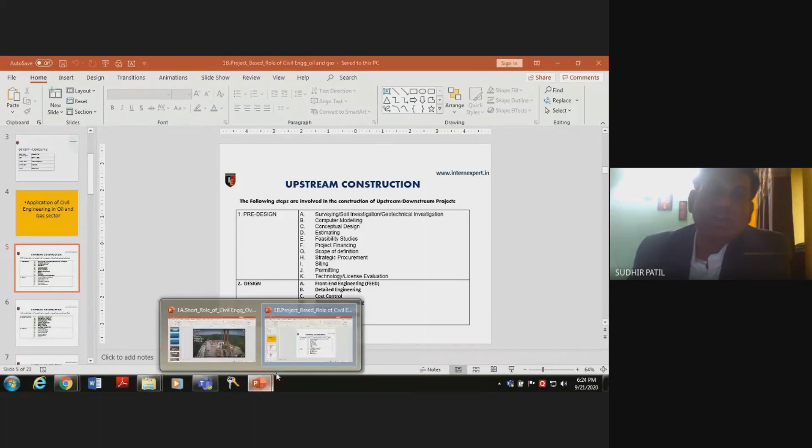In this computer modeling, it is expected that you must consider all types of loads, and those loads must be taken into account for analysis. Whenever we are going for the analysis, we must understand how much load is coming on the structure, on this platform, how much load is coming onto it. Then we are going for the design part.

So this work we are going to perform in the offices, that is software based work we are going to do. Because it is hardly impossible to have manual analysis and design, it is very complicated work to perform on the site.

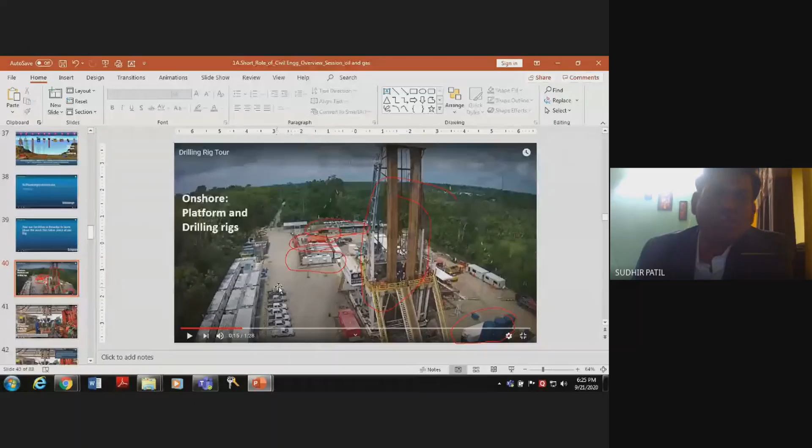So there are various software we are going to use. There is MIDAS software, then SAP. Various software we use for the analysis and design of the structure, the critical structure.

Sir, this is about onshore. But when we go for offshore, we also talk about seismic effect, earthquake effect underwater. We have to look for designing the stands, or we can say the platform.

But what about the wave force? Because tidal waves are coming continuously on that sea. For earthquake and seismic, we can assume that force will occur once in a while. But waves are continuously having their own force, which is not a quite low value, so we have to consider that part also, wave force or tidal force.

Yes, we can also consider the cyclones that occur at sea level. The cyclonic force, wave force, as per our discussion, those forces are there, provided we must also consider the buoyancy force. The cyclic load or wave tidal force must be considered, and we must prepare for cyclones also.

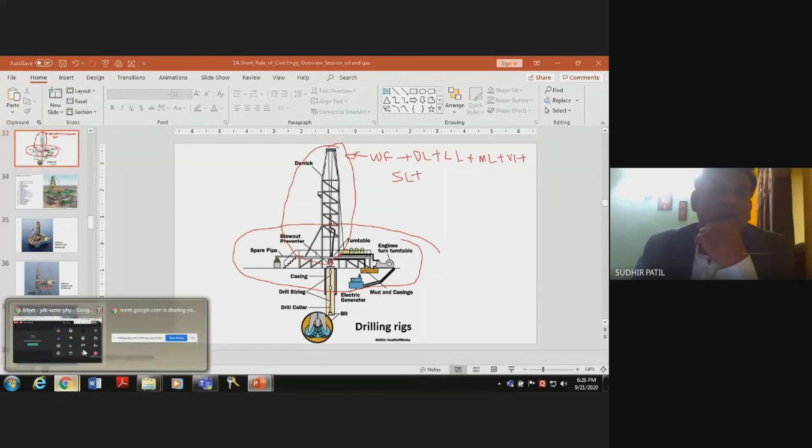So the important thing is you must set the CG of the structure platform. The CG plays a very important role in offshore regions. We must take into account the buoyancy force, which means the CG of the structure will balance all types of forces. Whenever there is a terrific cyclone, the center of gravity of the platform will be taken care of. It will not deviate, it will tilt, but it will come back into the original position. That is a very important point to consider while designing this.

As per our previous discussion, we engineers have very much potential in this sector, but people are not turning to it. Now people are becoming aware, but as per our observation, most people are still not turning to work in this field.

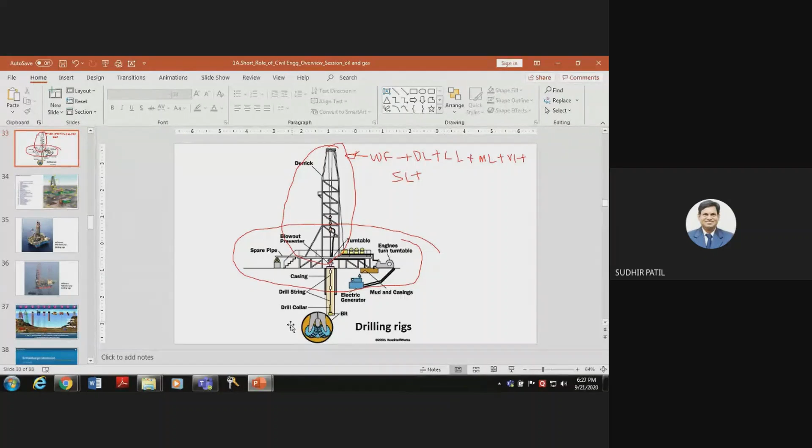Okay, go ahead, please carry on. Yes sir, so any other question? But why is it that design is a more happening section, as you told? Why are people not moving to do this design and analysis work?

The actual ground people are not going to the site, because we're working in the outskirts, isolated areas, or desert areas. Therefore people are not turning to go there. Otherwise software people are there - here in Pune, almost 2,000 seats are there in Aker Solutions in the software industry, where most engineers are civil engineers or civil designers playing into these sectors.

So how does CFD play a role here? Is there any role of CFD? Yes, listen. We must understand that software development is playing a major role in this. Without software we cannot do anything.

Simulation and software preparation, software programming plays an important role because we have the previous data. Since 1847 we have been working in the oil and gas sector, so we have huge data. By using this huge data we do computer programming, and accordingly we prepare the simulation for possibilities in the oil and gas sector, and accordingly we design the structures also.

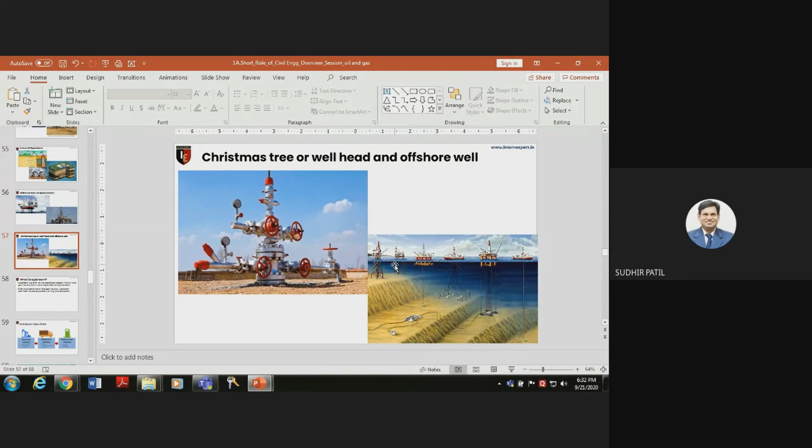This is the part designed by the mechanical engineer. Here we have certain pressures and connectivity. This is a drill hole or bore well. On that we have the vessels. Here there are various types of machines we are dealing with, like in the drilling rigs, various mechanical machines. This is the mechanical part, this is the core, the drill core. These machines are designed by the mechanical engineer, not by the civil engineer or electrical engineer.

So this is the role of the mechanical engineer, which plays an important role everywhere, in the upstream, midstream, and downstream side. Also in designing the midstream area, that means pipeline design, the design of trucks and tankers. These are done by mechanical engineers, not civil or electrical engineers. So we have tremendous potential for mechanical, polymer, petroleum, and computer science engineers. All engineers play equal roles and have huge scope in this area. As I said, it is a highly paid industry, and you must turn toward it.

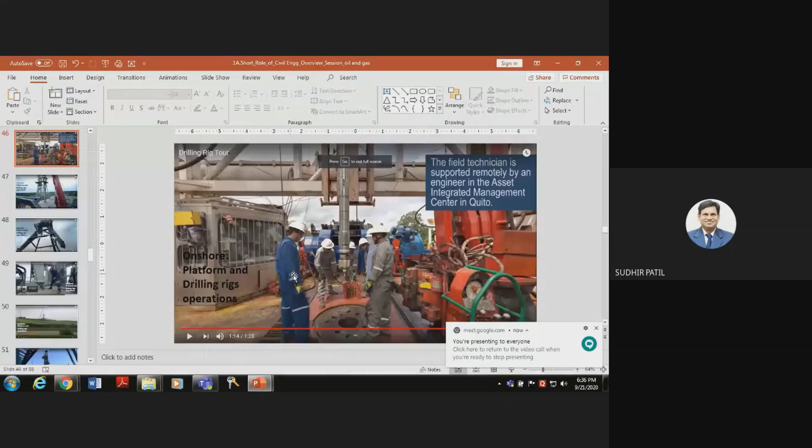Whenever we come to a refinery unit, we have the final products which are LPG, certain chemicals, and some petrol and diesel. So those products are coming from the refineries.

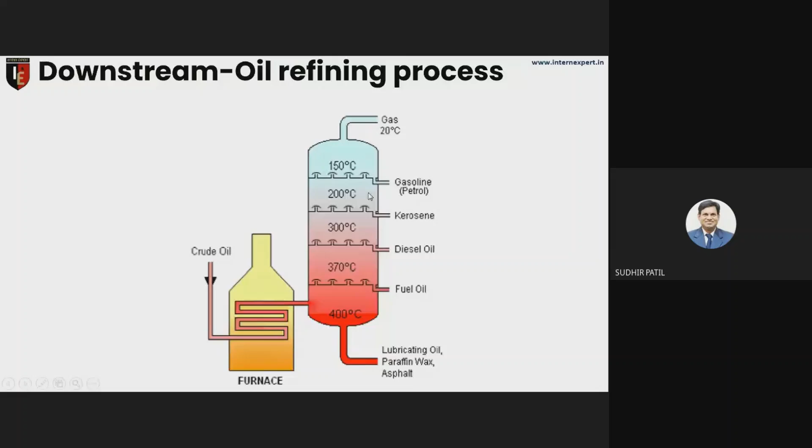Here, various engineers are playing an important role, which means setting up the outlet. It may be a petrol diesel outlet, or it may be an LPG outlet, or likewise various outlets. So those outlets are designed first.

The primary process is that you must select the correct site with connectivity to roads. Then we go for site selection, then analysis of the soil, then analysis and design of the forces coming on the structure, because we have various tanks which must be erected here. These storage tanks are for petrol, diesel, and gases, or LPGs. So those tanks must be analyzed and designed as per the capacity of the outlets.

Then we have the analysis and design of canopies, and various other structures are taken into account, meaning cabins are there. So civil engineers are doing all this work.

Prior to that, we must approach the agencies - BPCL, HPCL, Bharat Petroleum, Hindustan Petroleum. Likewise there are various government agencies through which we can get the license allocated to us. Once the license is allocated on a particular site, we will go for the outlet establishment.

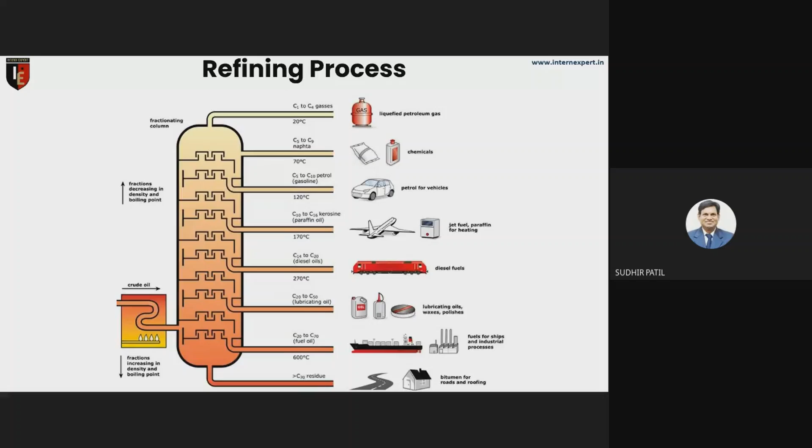I am also an owner of this - our Intern Expert has our own outlet. So in this way we have various chances to establish an outlet in oil and gas.

Yes, please. Hello sir. The day before yesterday, Mr. Rajesh sir also shared about the retail business, he shared some business opportunity. So sir, can you please tell the procedure in detail? Yes, one minute, what happened?

Dr. Bhagwan Gawai is there, he worked with the government sector. Sir Gawai sir, are you there? Hello. Your previous mentor, he is our chief mentor. Anyways, he may not be available.

What happens is there are some tenders, or advertisements which pass through Hindustan Petroleum or Bharat Petroleum or other agencies - nowadays Reliance is also coming under this. So we have to fill the online application for it. Nowadays it is processed to put up the online application, so they advertise the availability of licenses in various regions. Accordingly, you must select it through the online process, because everything is now online.

Digitization plays a very important role in our country because we are developing, so we are going through this digitization and reducing the paperwork. Through online application, we must apply for the particular outlet in a particular region. Then they will allocate the petrol pump or outlet as per your capacity and availability of land.

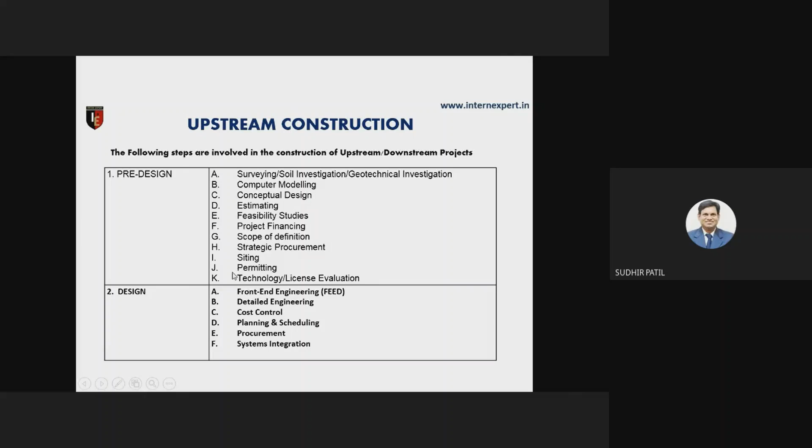Then we must use the feasibility study to see how feasible the area is for transportation of your product and all. So likewise, we have various stages: pre-design stages, then design stages, then construction, then startup of the unit. Likewise, we have various units.

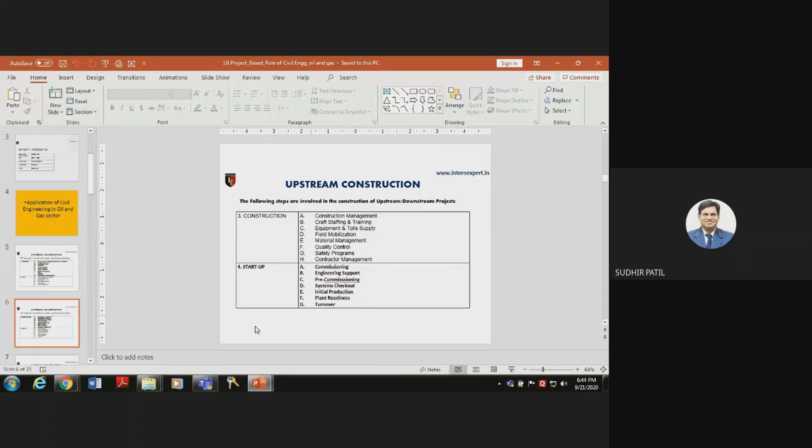As I said, this is a huge industry, and in this huge industry we have scope for all people. It may be engineers, MBAs, science students, or commerce students, because at the back end, technical and non-technical people are working. So all people have scope in this oil and gas industry. Accordingly, you must think and prepare the project report. By that, you will have the benefit for your final submission and to enter this field also.